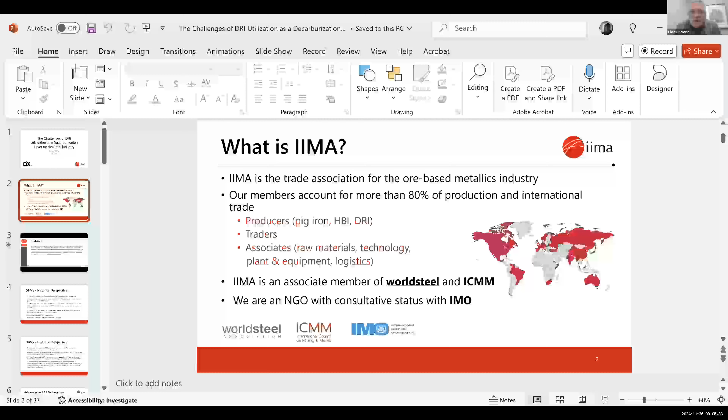Michelle, can you tell us a little bit about Jeremy? I'm sorry, Kyle, can you tell us a little bit about Jeremy's background? Yeah, and it's an honor to do, and I can't even talk, sorry. It's an honor to introduce Jeremy. Since I started in the steel industry, I can say I went to the very first AIST when I started 15 years ago, and got to meet Jeremy back when I knew absolute nothing about steelmaking. And it's been a pleasure to get to know him and learn from him over the years. So now it's an honor to get to introduce him for his presentation today.

Jeremy was born in Tonbridge, England in 1961, immigrated to Canada in 1966. Jeremy grew up in Ottawa, Canada, attended Queen's University, Kingston, Canada, earning his Bachelor's of Science in Chemical Engineering in 1983, followed by a Master's of Science in Chemical Engineering in a glorious year of my birth, 1985. Good job on that, Jeremy. That was a great year.

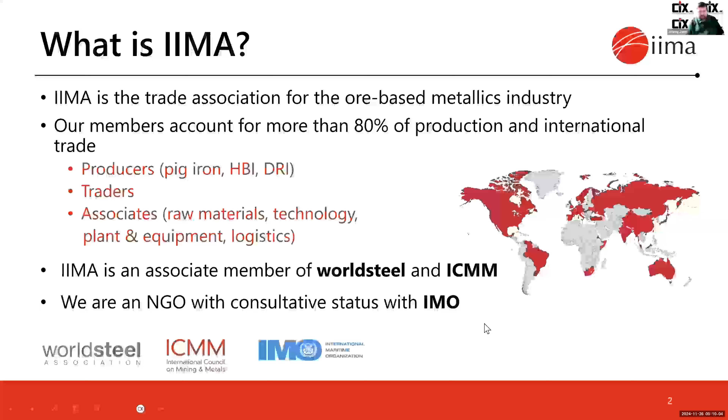Just the standard sort of disclaimer, and we'll move on. So when we look at ore-based metallics, the historical perspective is that we've used ore-based metallics in the EAF for many years, especially here in North America, because we actually started to utilize these materials as we moved into higher and higher quality products in the EAF.

In that respect, North America has led the way. North America was the first region that produced high quality flat products from the EAF.

Also in the early days, areas that lacked sufficient scrap to support EAF operations turned to DRI as a source of metallics. A perfect example of that is the Middle East, but also some regions in South America. Areas that have cheap and plentiful natural gas, it was sort of a natural fit.

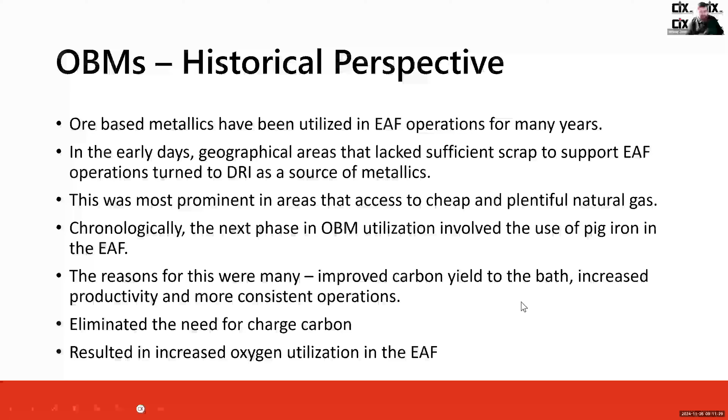And then as we evolved into higher quality products and the need for better consistency in the operations, we began to use more and more ore-based metallics, and this was coupled with increased use of oxygen in the EAF.

Essentially, we have an insufficient supply of prompt scrap to support some of these operations producing flat products. So this necessitated the utilization of DRI, HBI, and pig iron. And then this continued to evolve.

We've reached the point now where ore-based metallics are actually a key enabler for scrap circularity, because as we have rising residual levels in our scrap, we have to find a way to dilute those. We haven't developed any method to remove residuals. So until we do, dilution is the solution.

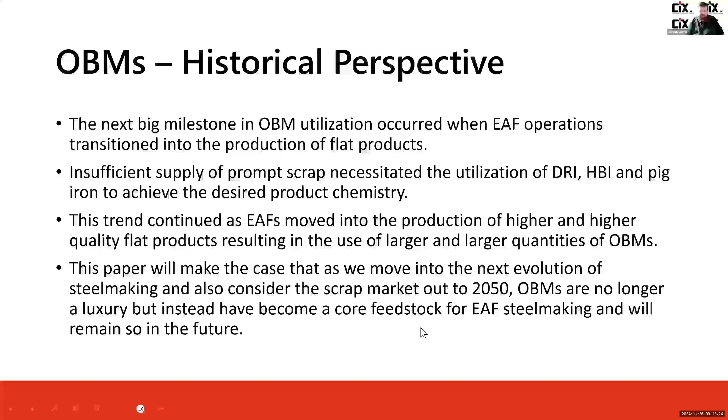When we look at advances in EAF technology, further decarbonization of the EAF is heavily dependent on renewable energy, but also on higher quality raw materials. And this is an area that's frequently ignored, though we have seen a few companies in the US recently embark on programs to produce and generate higher quality scrap to charge to the EAF.

In order to get greater renewable energy available, we really need to upgrade the electrical grid. We aren't really situated where we could just flip a switch and transition to all renewable energy in North America right now. We need more efficient power storage technologies and more efficient renewable energy technologies. We've seen advances with things like solar cells—some of the recent advances have doubled the efficiency from around 20% to almost 40%. Those are the kinds of things that we need to see.

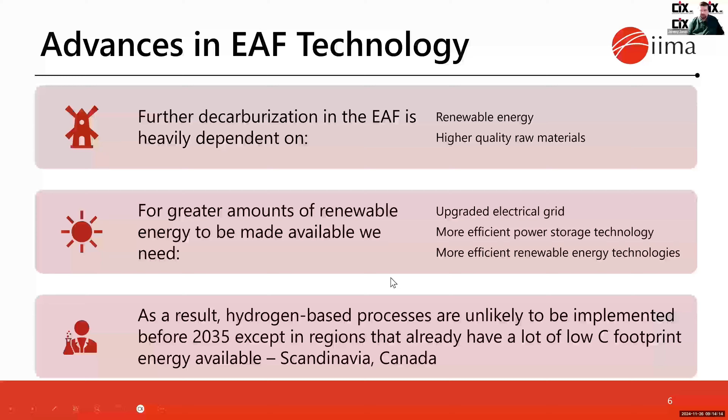As a result, hydrogen-based processes are unlikely to be implemented before about 2035, except in regions that already have a very low carbon footprint energy available. So look at Scandinavia and Canada, where there's a lot of hydroelectric. Also in Canada, you have CANDU, which is a nuclear technology. So those would allow you to produce green hydrogen. But most other parts of the world, it's really grossly uneconomic right now to try to produce green hydrogen, and the amount of energy that's required is enormous.

As I mentioned, we need to understand how scrap fits into the overall picture, because the future is a balance between scrap and ore-based metallics. So if you look at scrap as a decarbonization lever, 100% scrap operations utilizing EAFs already have a fairly low CO2 footprint compared to integrated plants. But that's not saying that they don't need to do anything.

The footprint can be lowered even more through improvements in efficiency and improving iron yield, as well as removing extraneous material from the scrap before it's recycled. So we really need to understand the properties of the scrap, its value and use. And what we're fighting is that we are seeing increasing levels of scrap residuals, and we need to find a way to slow that down.

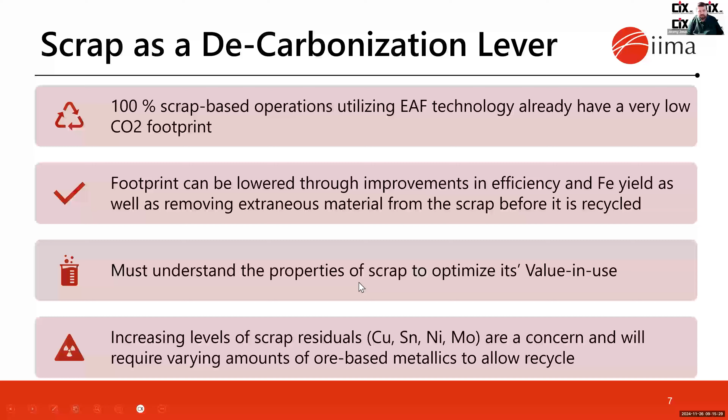So when we look at the challenges for scrap, rising residual levels is probably the biggest one. But then a close second is the dirt, gangue, silicon content of scrap. This contributes to the amount of fluxes that are required and has a huge impact on iron yield in the EAF. That's something I'll dig into in more detail a little bit later. The non-metallics content of scrap—as one of my friends said, we need to stop using the EAF as an incinerator. What we want to put in the furnace is the Fe-bearing material. Anything else really contributes to additional waste products, byproducts, or environmental issues in the operation.

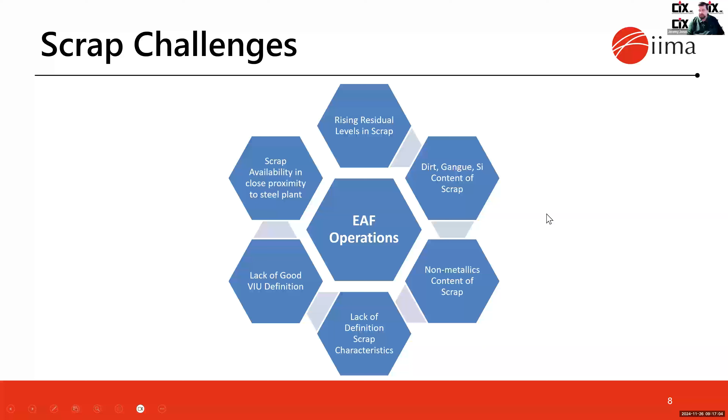We have a lack of definition of scrap characteristics. We tried to address this and have actually defined a global matrix of scrap equivalencies, but there's still work to be done there. The lack of good value-in-use definition—again, we've tried to address this within CIX with some of the tools that we've developed. And more importantly now, scrap availability in close proximity to the steel plant, because if you're transporting scrap great distances, there's a carbon footprint associated with that.

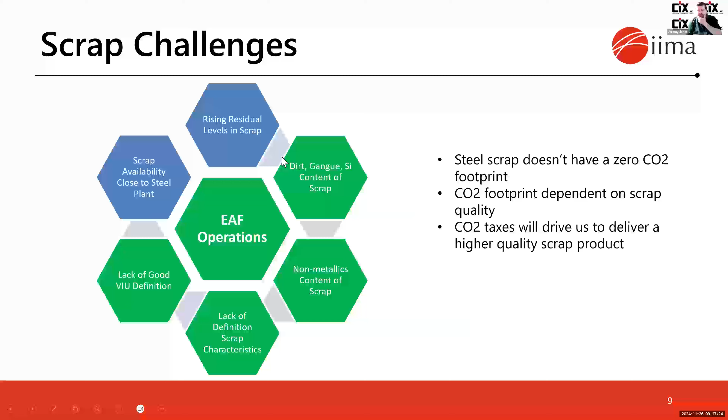So when we look at projections of scrap availability, this is data that's generated by World Steel. And you can see that post sort of 2025, in the developed world—the EU, North America, and Japan—scrap availability is pretty flat. The areas where we see a huge increase are in China, the rest of Asia, and then the rest of the world, especially post about 2030, 2035.

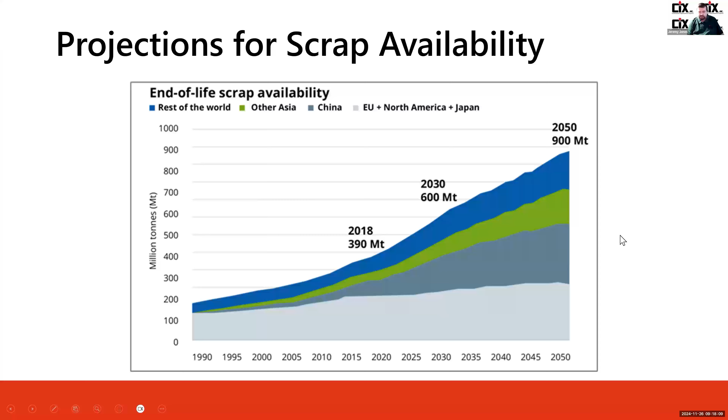Now, that being said, and I hear this argument a lot—oh, there's plenty of scrap available, it's not an issue—but is it the right scrap? So what we see is that the projections for generation of home scrap are fairly flat going out into the future. Prompt scrap, a slight increase as we start to get higher grade products and manufacturing growing in the rest of the world. But what we see is that the obsolete scrap supply increases enormously. And the problem is that this is where we're seeing the steady rise in residual content, which makes it more and more difficult to utilize that material. So we have to come up with solutions, otherwise we'll be landfilling obsolete scrap.

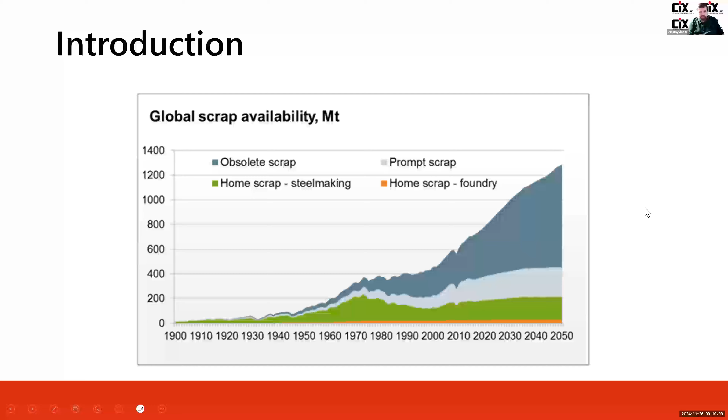So when we look at things like the copper levels, on average, the average copper residual worldwide right now is probably in the range of 0.25 to 0.3 weight percent. What that means is, depending on the product that we're trying to produce with that scrap, the amount of ore-based metallics that we have to add increases. So if the scrap hits 0.5 weight percent copper, which is what the projections are saying we will reach by about 2050, then to produce a 0.1 copper product, you'd have to use 80% ore-based metallics that have essentially zero residuals, and you'd only be able to use 20% of this material.

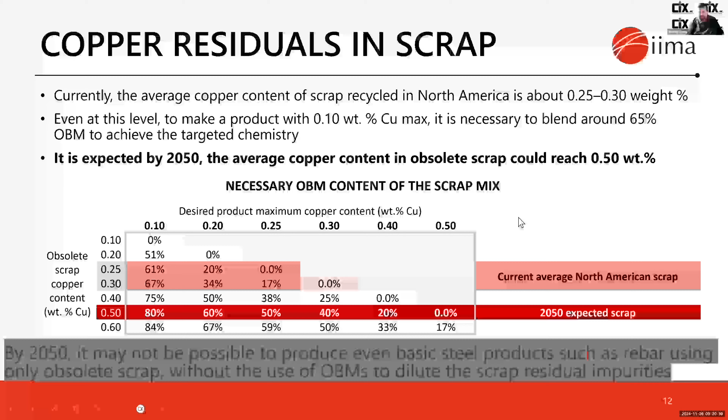So in North America, the short-term solution has been dilution. We are probably one of the largest users of ore-based metallics in the EAF, and we use those to dilute the residuals.

Without the ore-based metallics, a significant amount of obsolete scrap will reach a point where it can't be recycled at all. The reality is that the availability of prime scrap is shrinking in many mature economies, because manufacturers always want to become more efficient, so they're trying to generate lower quantities of scrap. Obviously, the amount that can be recycled back to the steelmaker is shrinking.

At the same time, some automakers are calling for higher quality flat products made without some ore-based metallics, because of the carbon content and the CO2 footprint associated with them. So this is a bit of a dilemma.

But what we have seen is that due to the scarcity of pig iron that came about because of the Ukraine conflict, in North America, several steelmakers reacted to this by starting to upgrade scrap quality.

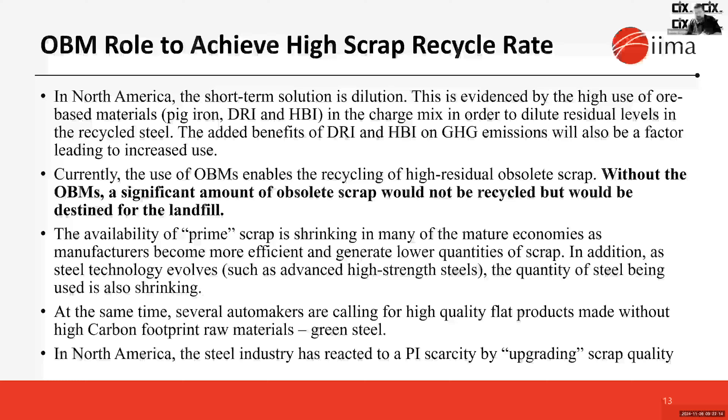Other considerations for the use of ore-based metallics: it greatly aids with the consistency of EAF operations, hitting the same sort of melting chemistry. It's very effective for pacing operations in the steel plant. It allows you to utilize more medium and lower grade scrap, helps to close the loop on the circular economy, and supports greater steelmaking capacity moving towards EAF. So we still see a need for the ore-based metallics.

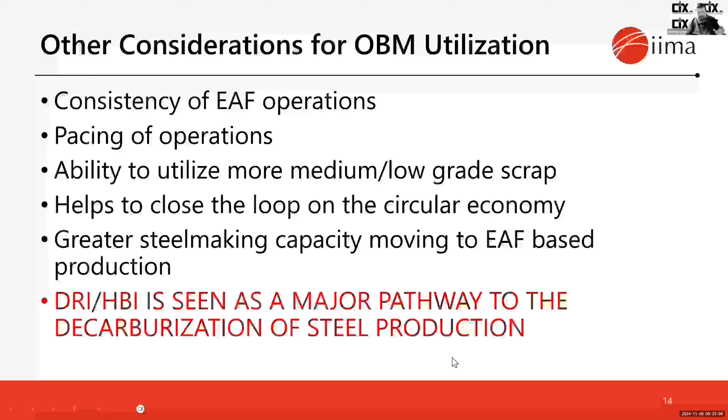As a result, DRI and HBI are seen as a major pathway to the decarbonization of steel production.

So if we look at some of the projections, these are some of the figures that are being put in various publications. I'm not going to spend a lot of time on these, the slides will be available afterwards, but essentially you see that the plan is to move to EAFs utilizing DRI, eventually with hydrogen, to achieve a very low CO2 footprint in the future.

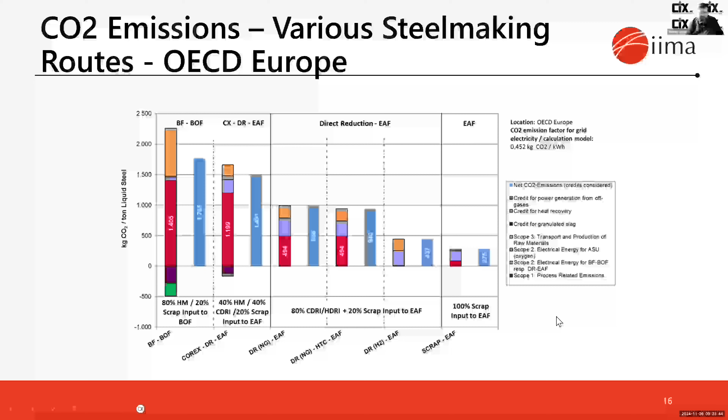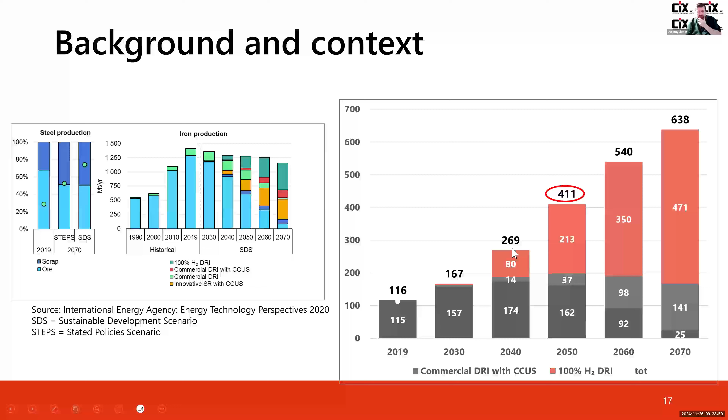And again, just some additional figures on what various groups are projecting out to 2050 and even as far as 2070.

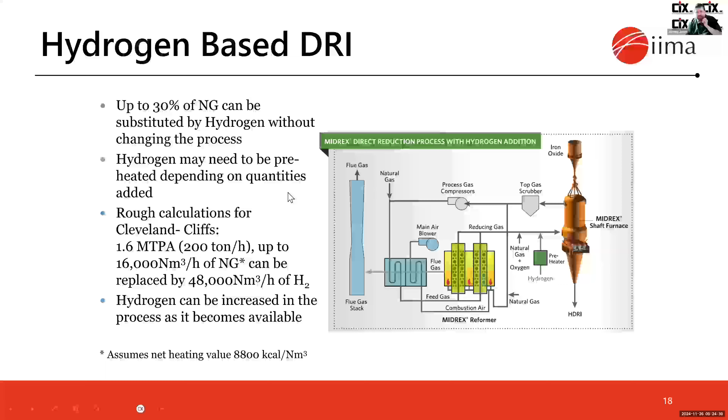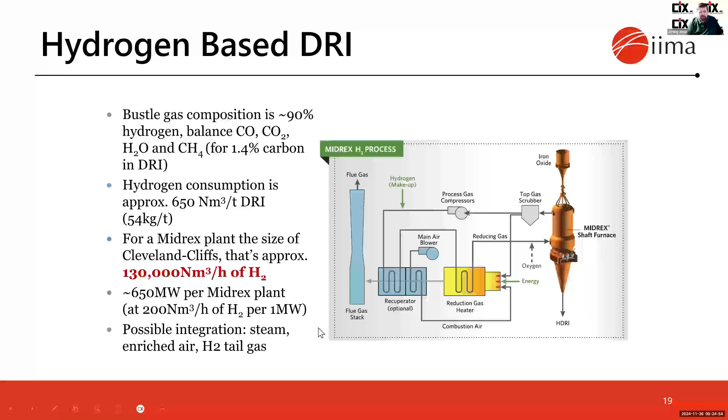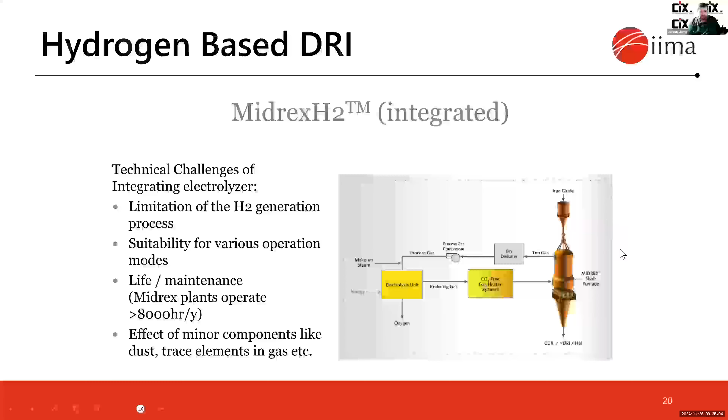It's more of a question of the availability of the hydrogen, and the fact that it takes a huge amount of power to produce this level of hydrogen that's required through electrolysis, which is the green approach to producing it. Okay, won't spend a lot of time on that.

One of the more concerning factors is the availability of DR grade iron ore. Typically, most of the DRI is projected to be used in the EAF, and so ideally we want a very high iron content in the material used to produce the pellets. We want the acid gangue content to be as low as possible. This impacts things more, the more silica and alumina you have in your pellets.

The problem is that you typically use almost 1.5 tons of pellets to produce 1 ton of DRI or HBI. So what happens is, if you had 2% silica in the incoming pellets, you would have 3% silica in the product.

And then this silica and alumina, when the DRI melts in the furnace, it will report to the slag, and you have to offset these acid slag components with basic slag components, lime, dolomitic lime, and fluxes. Basic fluxes have a very high CO2 footprint. In addition, this results in much more energy requirements for the slag, and it results in higher yield losses.

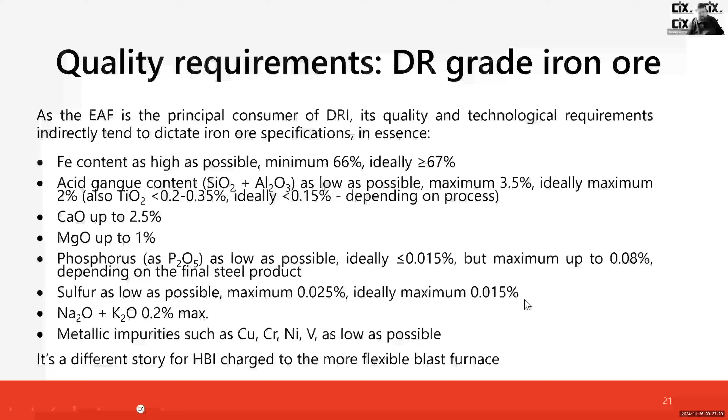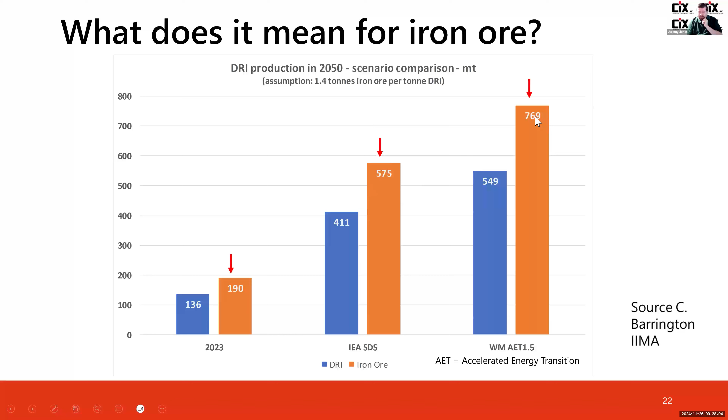So when we look at various scenarios, and this is a slide from Chris Barrington at IIMA, it looks at various projections and shows the amount of DR grade iron ore that's going to be required by 2050. You can see that it's either tripled or quadrupled, depending on the projection you look at. Chris does a survey every 6 months looking at DR grade iron ore that will be coming online, and even out to 2033, based on projects currently announced, we find we've got a shortfall of about 36 million tons a year of DR grade pellets just by 2033.

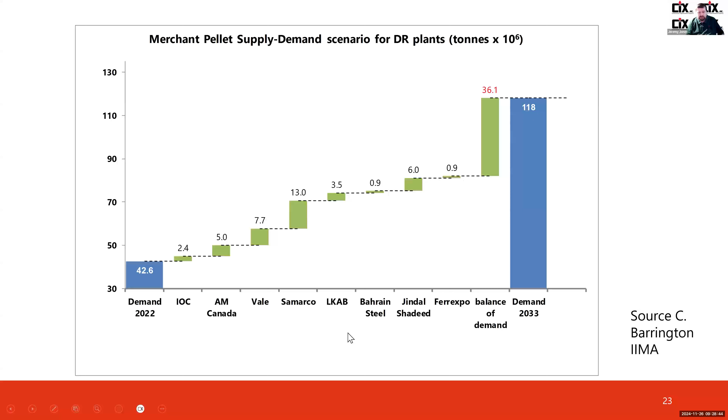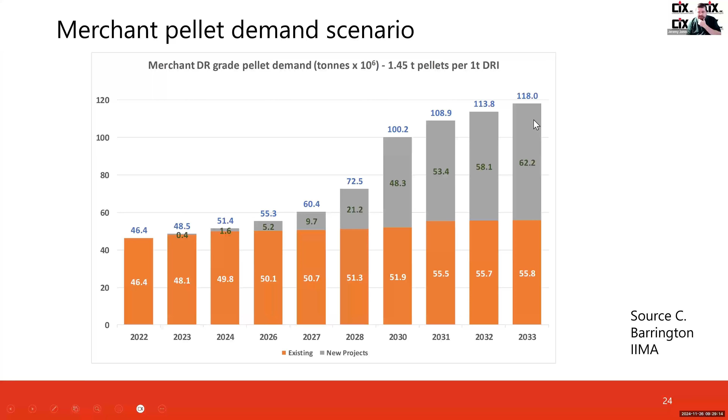So again, if we look at this projection out, knowing that we need 1.45 tons of pellets per ton of DRI, you can see the impact here of how much these new projects are going to increase the demand for these pellets.

Now, some people have started to look at developing a process flow sheet whereby you use lower grade pellets in a direct reduction process, followed by hot feed to a melting furnace, which does a very small amount of smelting. Essentially they produce pig iron in this furnace so they can separate out the gangue into the slag, then use that pig iron hot metal downstream in the BOF. So essentially for some integrated plants, they would maintain the same process flow sheet and just replace the coke oven blast furnace with a DR shaft and one of these smelting furnaces.

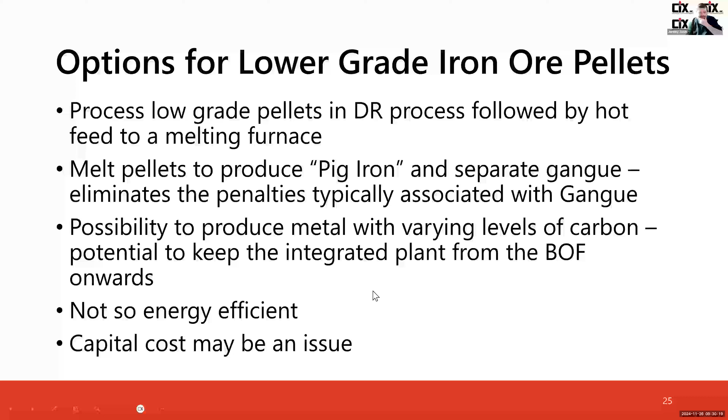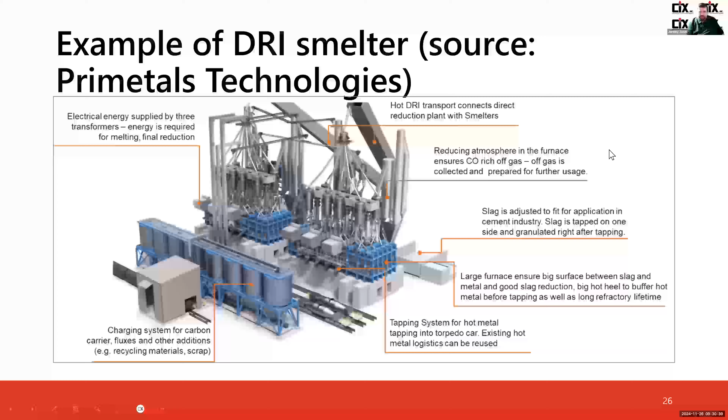When we look at the overall energy efficiency, that can be an issue. Likewise, the capital cost. These tend to be fairly large furnaces. This is a representation from Primetals, just gives you an idea of what we're looking at. And again, it's a new technology for us to have to become familiar with.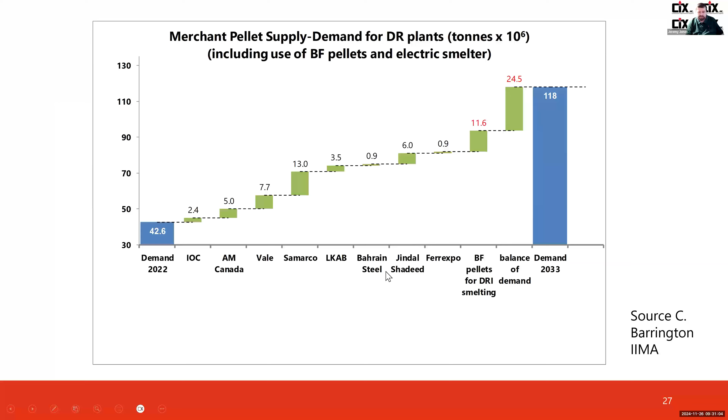So let's talk about some of these quality concerns. What we've seen worldwide over the last 15 to 20 years is a steady increase in the phosphorus level in blast furnace pellets. That's because we tend to mine out the best quality early in the life of a deposit, and now we're getting into blending in other ore that, while its properties are quite good, has higher phosphorus levels.

Both acid gangue and phosphorus increase basic flux requirements, increase energy demand, extend your power-on time, result in higher yield losses, and result in a higher CO2 footprint per ton of steel.

So most EAFs utilizing ore-based metallics with high acid gangue content tend to operate at low slag basicity, typically a B3 of 1.5 to 1.7, in order to reduce the slag volume and the associated impact of iron losses.

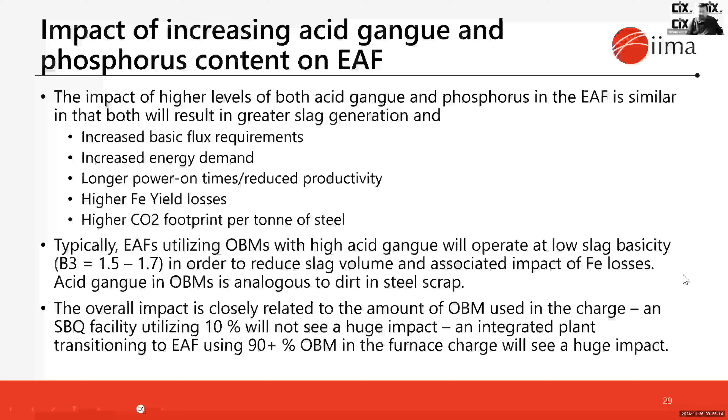And of course, it depends how much of these OBMs you're using in the charge. What we see is that a lot of existing EAF operations, even those producing flat products, might use anywhere from 10 to 40% OBMs, depending on the grade being made. And what we see is that the integrated plants looking to transition are all planning on using about 90% OBMs in the furnace charge. So the impact on them is much higher - the impact of gangue and phosphorus will be much higher on these integrated operations that are transitioning because of the quantity they're utilizing.

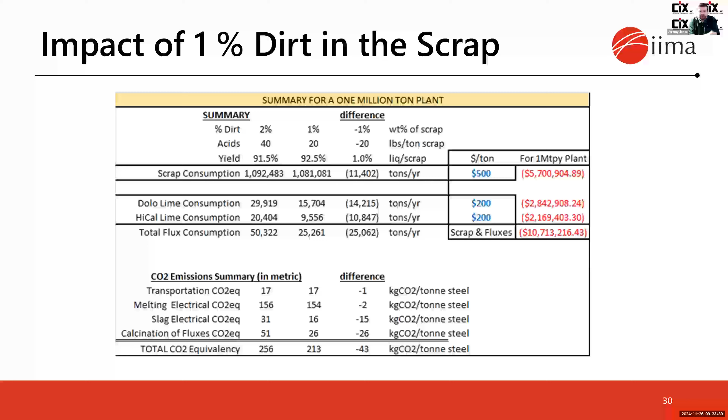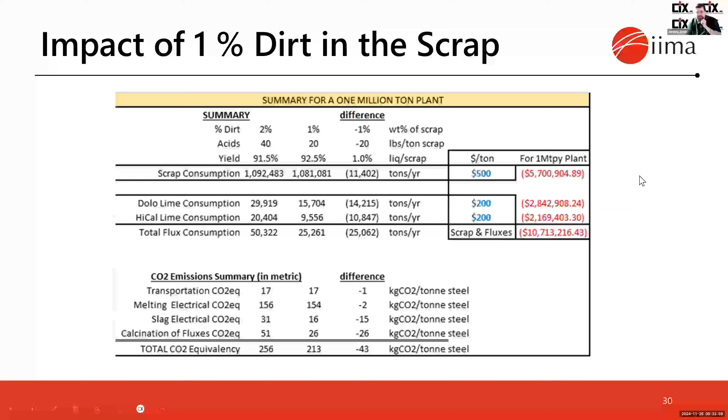Just to give you an idea of the impact of an additional 1% gangue or 1% dirt in the scrap - this is a summary we generated within CIX for a 1 million ton a year plant. We found that the cost is about $11 per ton, and the impact on the CO2 footprint is an additional 43 kilos per ton of steel produced. So dirt content and gangue content are really, really important.

Now, when it comes to phosphorus, phosphorus removal in the EAF requires high slag basicity, but also requires higher FeO levels in the slag and a low bath temperature in order to promote the driving force to push the phosphorus from the steel into the slag.

So if the OBMs have high acid gangue and high phosphorus, the impact gets greatly amplified because you can no longer operate at a low basicity. Now you're going to have to operate at maybe a B3 around 2, maybe 2.5 or even 3, depending on how extreme the situation is. This can have a significant impact on the amount of flux you have to add and the iron yield losses. So potentially rising phosphorus levels in DR grade pellets have the potential to be a much bigger issue than even acid gangue, and this could have a huge economic impact. So this is something we have to pay attention to.

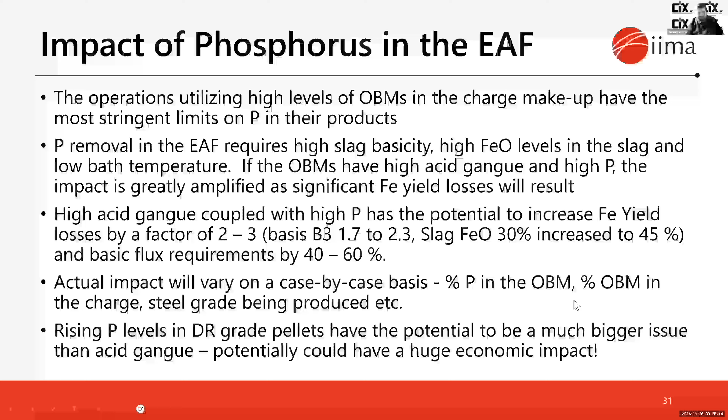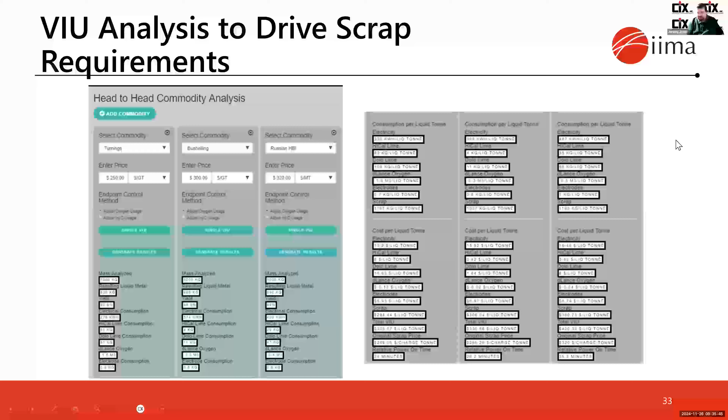So when we look at some of the tools that we have available to understand our raw materials, internally at CIX we developed a program that allows comparison of different materials. This program gets tuned to particular furnace operations currently being run at Big River Steel. In fact, we developed this initially at Big River, and they use it to help design charge mixes, but also to plan out their scrap buy each month.

And then we coupled that to a carbon footprint model. Again, this was a model initially that we developed to aid Big River Steel in getting certified under the Responsible Steel Program.

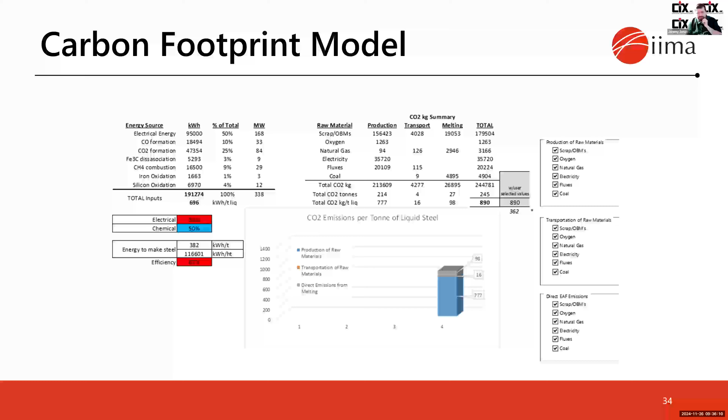So we really have to drive towards cleaner raw material input to steelmaking, and by that I mean lower residual, but also lower dirt or gangue content. The ore quality and availability is going to be very critical to the rate at which DRI and HBI production expands. A much better understanding of raw material value in use, and how best to use iron-bearing materials in the EAF, is needed. But DRI and HBI are definitely very integral to the circularity of steel scrap and enable higher rates of recycle to be achieved.

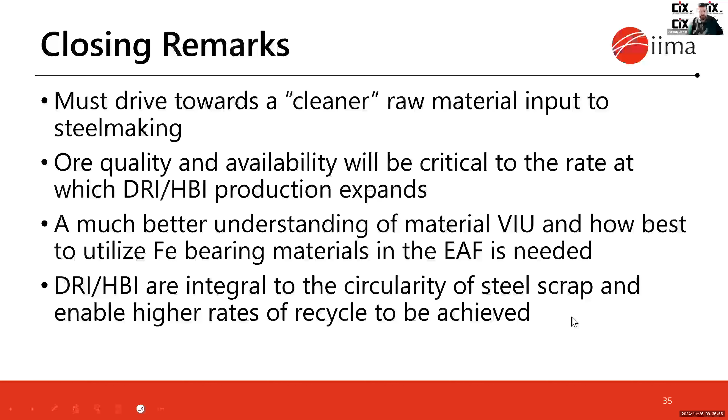What we need to do is find the correct balance of OBMs and scrap for the steel products that we're producing. So far, I think in North America, we've done a pretty good job of that. Segregation of higher quality scrap can help to lower the demand for OBMs.

And if we can clean up our scrap, if we can reduce the amount of free copper that comes along in our scrap, then we reduce the demand for the OBMs. So that's sort of a sustainability thing and also circularity. Upgrading scrap quality is really integral to sustainability and helping to reduce the carbon footprint. So we need to take a much more multifaceted approach to develop longer-term metallics strategies.

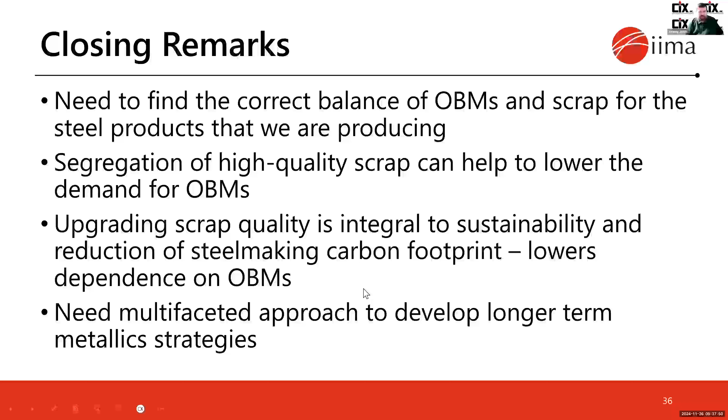If you need more information, you can get it from the IIMA website, or you can contact me, or I can put you in touch with other people if I feel that they have a better answer to your questions. So hopefully that gives you a quick overview of some of the challenges, and I'm happy to entertain any questions.

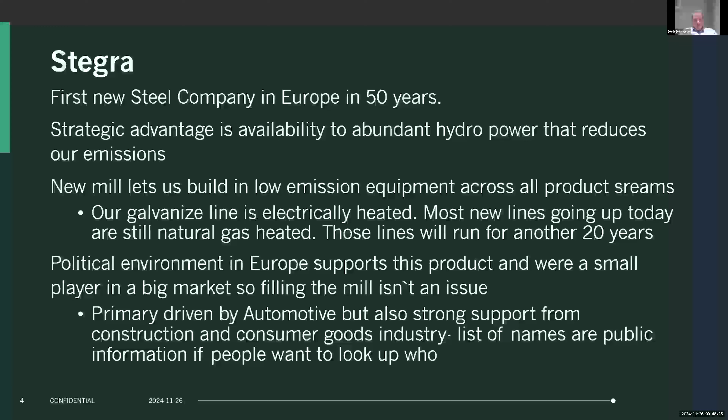The area that we're building is, I'll say, politically supportive. The players in the market are politically supportive. They're also our investors. Automotive is one of the big drivers, but we're also seeing huge interest from customers in the construction industry, and obviously the white goods industry, etc.

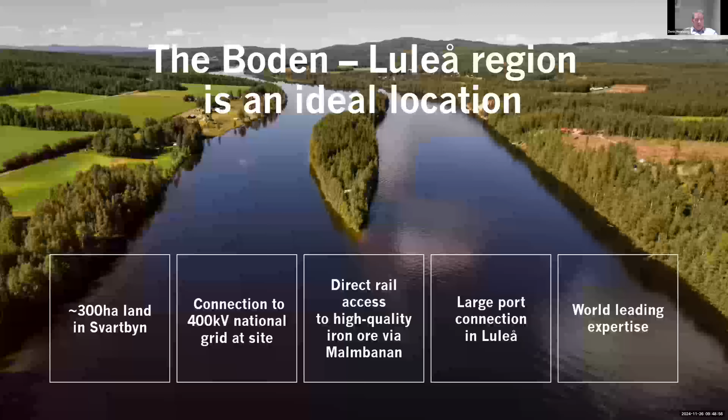300 hectares of land. You can see we're located right beside the national grid. We have direct rail access. Port Lulea is about a 30-minute car ride away, and we're just trying to hire the best and brightest to come in and join us to help us get this project over the line.

When we look at this and talk to investors and suppliers, each of these technologies by itself is not new. I think that's typically, as engineers, our job is to assemble different pieces together and make them work in a different way. Electrolyzers have been around forever. The size of our electrolyzers is probably one of the world's biggest, not the biggest, but up there. TK Nucera is our partner in that.

DRI towers, again, they have a great history. They're mostly hydrogen with some nitrogen. How you form that hydrogen is the key. Midrex is our technology provider. We have performance guarantees, etc.

Hot feeding from a DRI to an EAF is not new, it's done around the world. Mini mills, again, not new, we're all familiar with them. Nexus, we have the second generation of their Nexus plant. Electric heating, galv lines, batch anneal, bright anneal, we've used this. All that technology has been around for quite a while.

So sometimes people outside our industry, we just say it's like an iPhone. There's always been computer chips, there's always been programming, there's always been cell phones. But that guy put it together in a better package. We kind of compare ourselves to that. It's a better package of existing technologies, some of them scaled up differently than others. But every time you build a steel mill, you look for an opportunity to make those improvements from the past.

And how we compare, there's definitely advantages. We aren't looking to compete against 50-year-old mills, because we're putting all this capital into this. Our hydro, wind and solar lets us do what we do and reduce our emissions, recognizing that typically oil, nuclear and gas is how most mills do run.

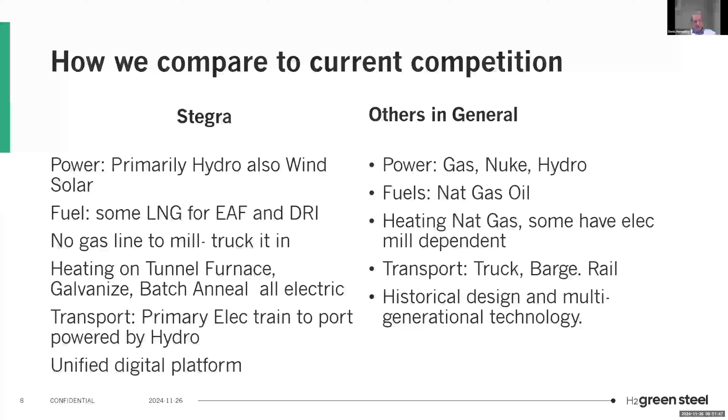So what we do, basically what we talked about, is hydrogen production, because we have this green, low cost electricity. It lets us drive our electrolyzers and our DRI reactor. And even with an electric arc furnace, you still need that.

We do bring in scrap from external sources. It's not as big a commodity up in the Nordics. We do import from other places. It is closed loop. We have agreements with our customers. When we sell steel, we get back their scrap. So coil's out, scrap in.

It's a good relationship. To all the points mentioned earlier about residuals, we do make our own DRI. We generate it on site. Were there to be a hydrogen pipeline, we would more than likely participate.

Our goal is to participate in any front that lowers CO2 emissions. So whether it be concrete, other heavy industries, anywhere we can support, be involved, or be a player in that field, we are interested in doing that.

And the net result when we're done with all this is a 95% lower carbon footprint. And even from the beginning, there's 50 projects we could probably start doing to reduce our carbon footprint even more. But it's always a cost thing - to make a product so expensive no one can afford it doesn't make sense. First, we need to just get up and make a coil. That's kind of where it all starts.

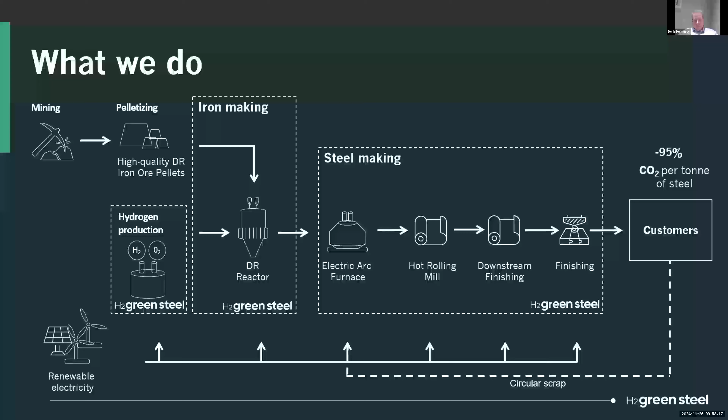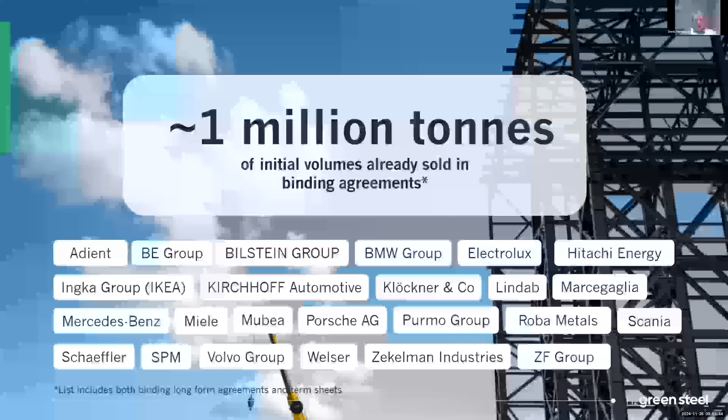These are all public records. All sorts of groups, suppliers, automotive, they've all stepped up, supported us. We have 7 years of contracts with these people that we use to go to the banks and provide collateral. That's how you build these projects.

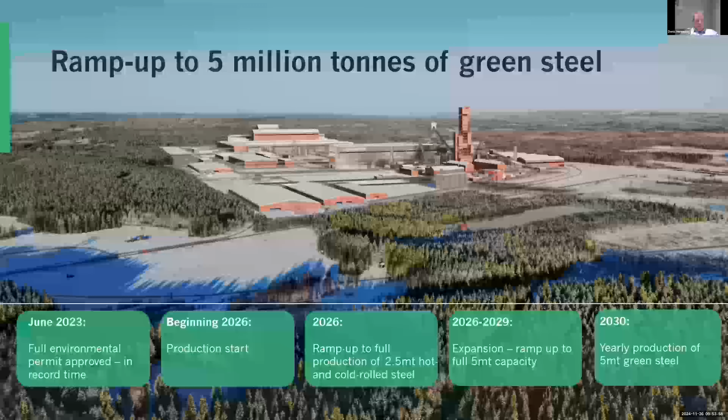And again, phase 2, we want to ramp up to 5 million tons, third EAF, another set of LMFs, another RH, another caster, added tunnel furnace, third coiler. And then we look at some downstream processing, where else we can do it.

Growth projects: we're interested in Portugal, being a DRI player there. Brazil, it's made of iron, has great hydropower resources. Texas, it's well known as a place where people make DRI now. Quebec, as said earlier, the hydro resources up there are second to none.

It's able to be gained within 5 years - we could bring on hundreds of megawatts of power, which is what you need to drive these sorts of projects. Power, power, power.

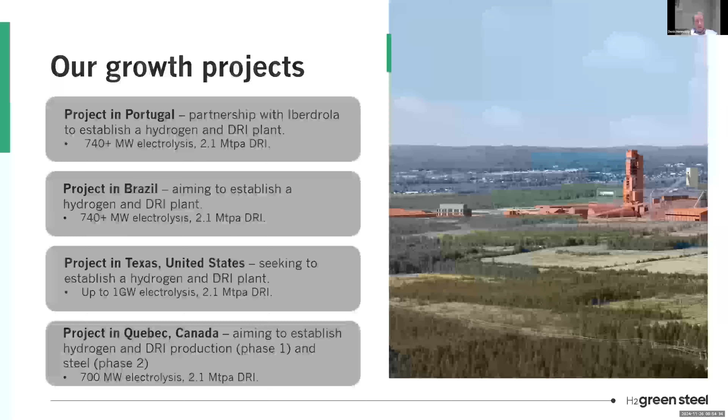What's it cost? Cost $6.5 billion. The joke was steel mills used to be made by millionaires. Now they're done by billionaires.

And the site's changed significantly since this picture was taken. It's covered in snow, but foundations are in all the way through the steel shops. We got the DRI tower going up. The footprint for the hydrogen is going up.

So it continues: 2.1 billion in equity. These are all the people that put up hard cash to support us. They've been there from the beginning. And banks, we always go hand in hand with banks, 4.2 billion.

And we had a $250 million grant from the EU, European Commission. Typically countries by themselves, at least on this side of the water, have a lower tendency to support directly. What it avoids is big countries supporting their processes over little countries, but this came from the EU for innovation.

We talked about our growth projects, our suppliers. Obviously SMS is doing the steel side. We have some other smaller vendors supporting us as well, all equally important. thyssenkrupp nucera, again, they spun that off. And that's kind of how we're building our plant.

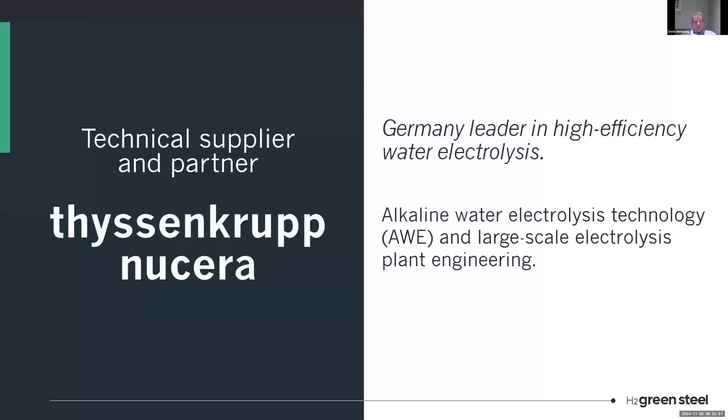But I will jump down to some questions while I got some time, if that's all right. And I may even stop sharing. There we go. So if you want, I can take some questions and answers, or how do you want to talk about that? Michelle, do you want to control the questions, or should we jump into it?

Peter asked, what's the price for electricity required to make this business model work?

Our cost of electricity is low, I'd take it as on par with the lowest you'd see in the US and Canada. There is a sensitivity around that. Then you look at how many kilograms of hydrogen you need to reduce a ton of iron, so it's going to be between 45 and 65, and what that means for how you scale it. For the business model to work, it's not only the price for electricity, a big part of it is raw materials and what you're trying to make. Hopefully that answers the question.

The question was whether LNG is used for carburization in the DRI. Yes, absolutely, that's where the majority of the LNG is used. We produce a DRI of 1.3% versus a typical 3.4 to 4% higher standard DRI unit, and that feeds directly into our EAF. We also sell cold HBI on the market. We do have pelletizers that we send out, and we have takeoff agreements as well.